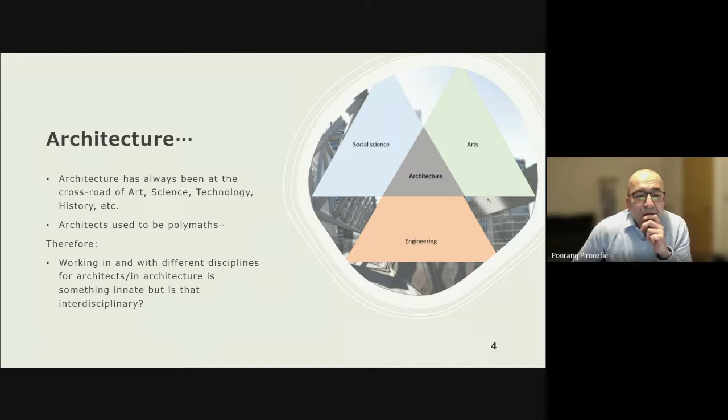But is that interdisciplinary? Probably yes and no. So what does it mean to work in interdisciplinary areas? It means that we need collaboration. We need to integrate different disciplines to some degree. We need to be quite strong in group work. As a result, we are expecting to have better generalization of the knowledge claim when we are talking about research. We would expect to have more specialized applicability of our findings to a wider scope of research. And we would be expecting a higher level or broader scope of expertise to be involved in interdisciplinarity in research.

So it's a yes and a no to all of the above mentioned concepts that we just covered. But more importantly, yes and no, because you can argue that all of these things are required, but they are not sufficient on their own. Having one of them doesn't necessarily mean that we are working beyond one discipline. So if we want to move beyond the application, it brings us to the concept of betweenness.

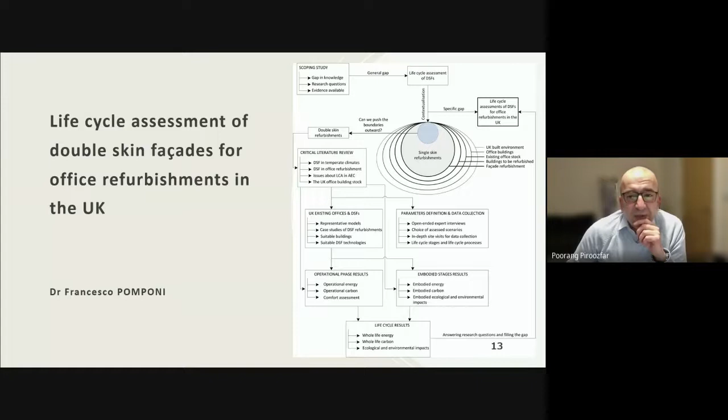Back to a couple of examples of the PhD projects I have led with an interdisciplinary nature. One project is a PhD thesis on life cycle assessment of double skin facades for office refurbishments in the UK. As you can see in the diagram, the project sits between different disciplines, involving office refurbishment of non-residential projects.

It involves an area of research called double skin facades, where we have a secondary facade system attached to the main facade system, within which operational energy studies and embodied energy studies are our focus. The third circle in this Venn diagram is concerned with life cycle assessment, specifically in the construction industry. You can see how different disciplines have cross sections, and where we chose to work in this particular project.

As you saw in the previous slides, different disciplines and different areas were involved, and we had to find those intersections to be able to make the contribution to knowledge.

Another project, by Dr. Yahya Ibraheem, who is probably well known to many of you at the University of Technology, Baghdad, is about integrated facade systems for highly to fully glazed office buildings in hot and arid climates, where Yahya chose to work on office buildings in Baghdad.

Again, looking at different disciplines, different parameters and variables involved in this project, they come from different areas where he had to investigate high performance glazing, integrated facade systems, PV panels and how they work, shading devices, and the external envelope of the building, then combine all of those factors, varying from angle, size, location, and distance from the main facade, to come up with the most optimizable solutions for having these integrated facade systems.

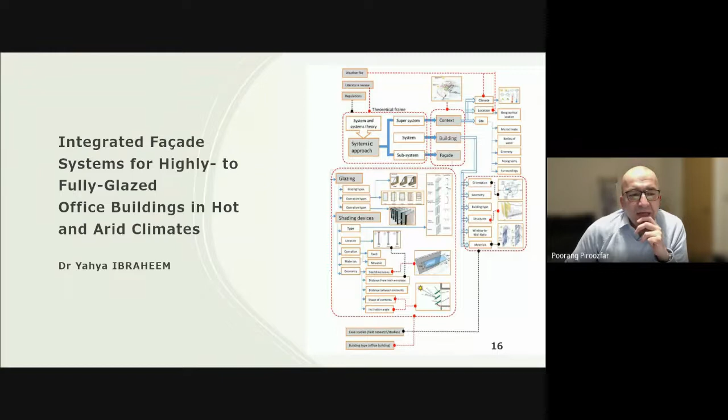These are all different areas which have been reviewed. As you can see, some of them have overlaps, but this is how the boundary setting for this project has taken shape, to create a multidisciplinary approach to review this work.

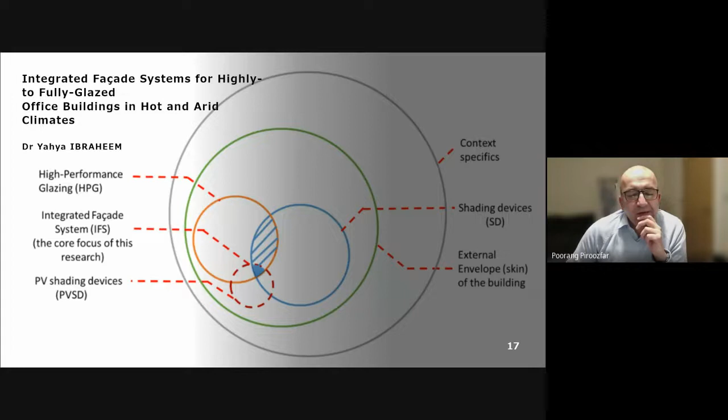A visualization of what we discussed: integrated facade systems added to highly to fully glazed office buildings, to make sure we can control and optimize the indoor environment of those buildings in terms of natural daylighting, glare, optimization of the use of artificial lighting, maximizing energy generation, and controlling shading and solar gain, which penetrates the building and reaches inside the building spaces.

The other project we would like to discuss is the judgment process in architectural design competitions as a deliberative communicative practice, which has been done by Dr. Nagam Al-Qaisi. I'll hand over to Nagam to talk about her project in more detail. Thank you.

The idea was that we started from the problem with judgment in architectural design competitions, as most architects know this issue. Architectural design competitions are done through a group of experts from different disciplines relating to building and construction and allied professions, in addition to different stakeholders involved, including clients, who could be from any profession, finance experts, especially in governmentally financed projects, politicians, and end users.